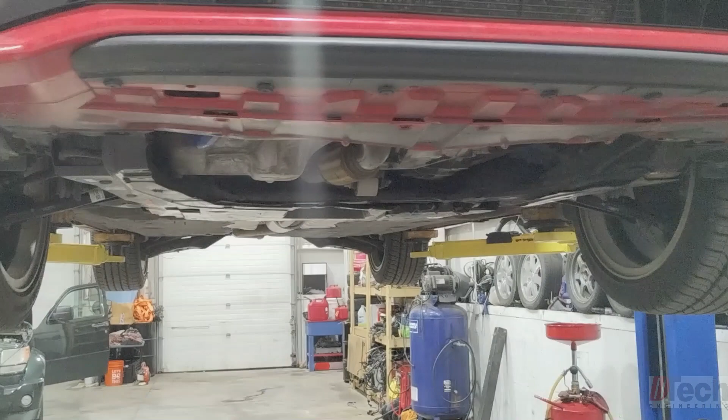So I guess we're just going to take it step by step and see if we can find out what the problem is. Obviously, if we're going to perform a visual inspection, we want to see if we can find anything that stands out or jumps right out at us, like a bent control arm or anything like that. But there's nothing really standout, nothing crazy underneath.

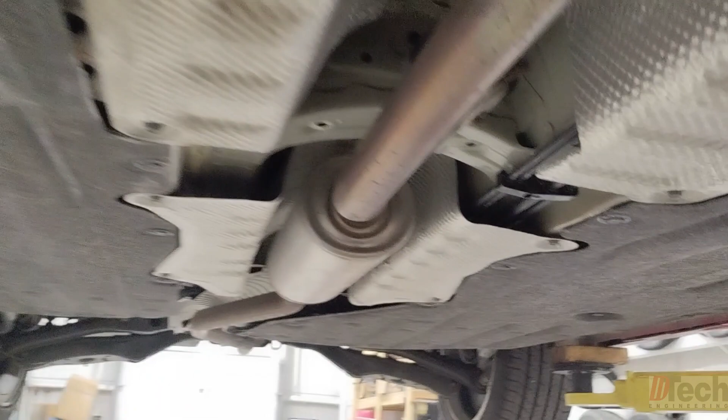Arms and stuff seem to look okay. As far as the axles, nothing crazy there, just visually. Again, we're just looking at them visually.

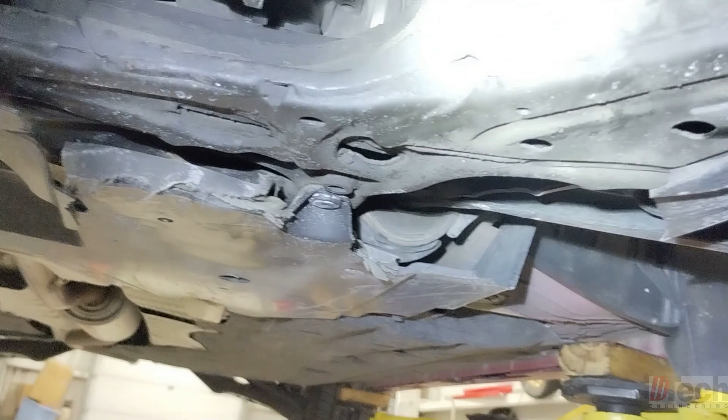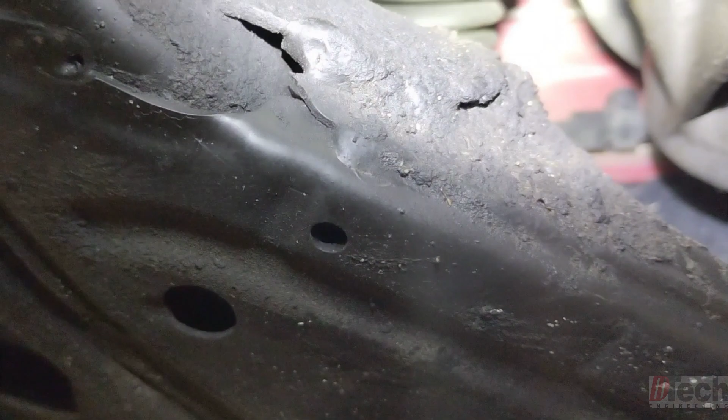It does look like possibly at one point this inner boot was leaking, or is still the one that is leaking. Actually, it looks like it is currently the one that is leaking. Let's see... yep, right there, the boot is torn. So we're going to keep that in mind.

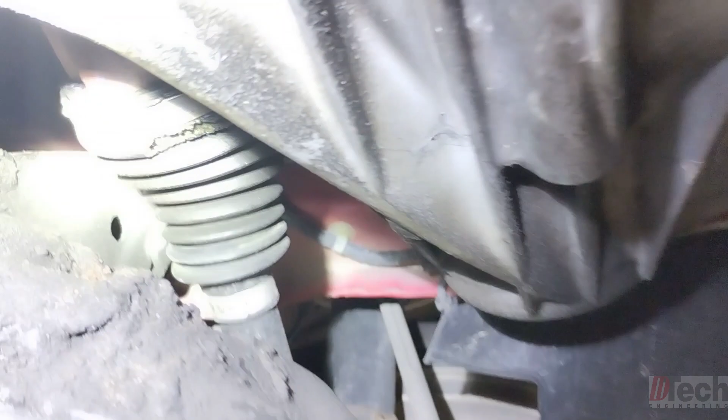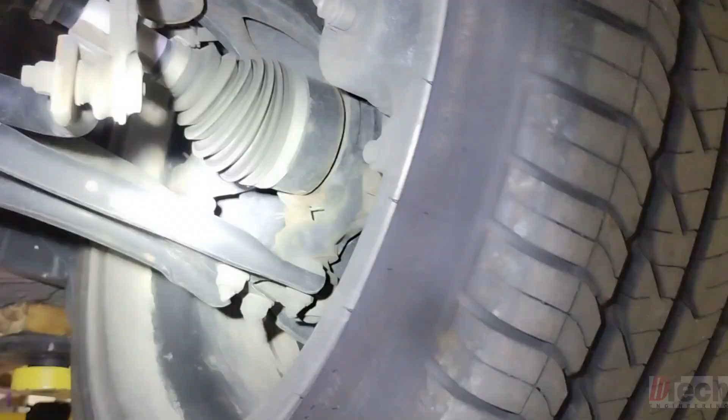Again, we're looking for a vibration deal. This is the two-piece with the half shaft, and you can see some grease coming out of that bearing area. Things to keep in mind. But suspension and struts and stuff, nothing crazy.

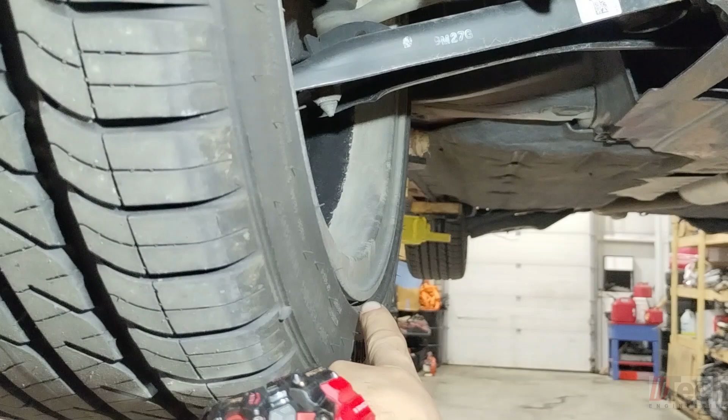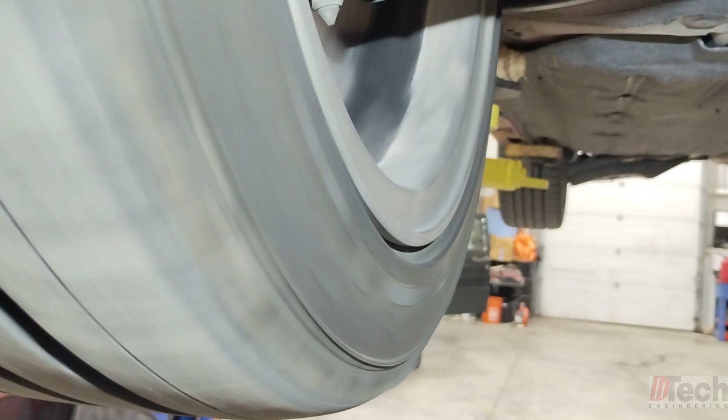The next thing I always do is check for bent rims. The way I do it is I like to get into this point of view area and look at this portion here while spinning it. If you keep your eye there... I don't know if the camera can pick this up well, but this rim has a bend in it.

Now if we look at this rim here, this one has a bend in it as well. It's hard to tell on camera. And then this rim here... there. So this one is bent pretty good. I believe this is the only straight one, the left rear.

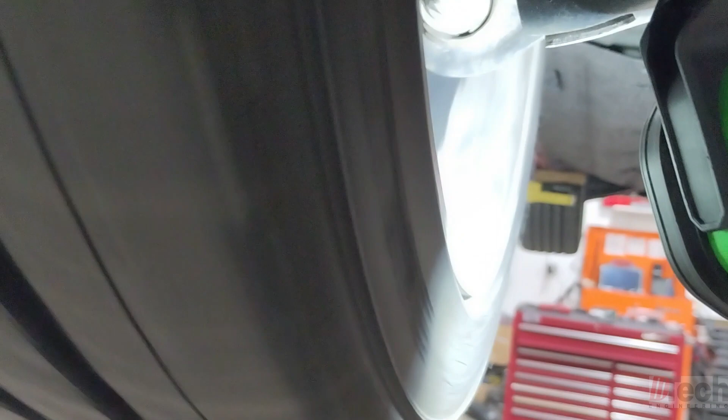Okay, so as far as the visual inspection, nothing too crazy. A couple axle boots, or axle boot and bearing up front, and 1, 2, 3 rims bent, one straight one. So whether the rims being bent is what's causing it, I don't know. It didn't feel like a bent rim, but we clearly have 3 bent rims. As far as severity, this one was the worst, those two are about the same. Nonetheless, they are bent, so things to consider.

So my next thing is I want to do a little bit of an experiment. Basically, I want to try to isolate or find the source of the vibration. We know we've got 3 bent rims, an axle boot on the left front that's torn, and bearing grease coming out of the half shaft on the passenger side front. So as far as visually trying to determine it, we don't know.

So what I want to try is hook up my chassis ears to all 4 corners, drive down the road to make the vibration occur, and first and foremost see if I can isolate it from front to back, and then from left to right, or if it's only in one corner. I want to be able to find it, so I'm going to do all 4 corners and see if I pick up any vibration on any of them, or a front or back deal. Let me get set up for that, and then we'll take a test drive.

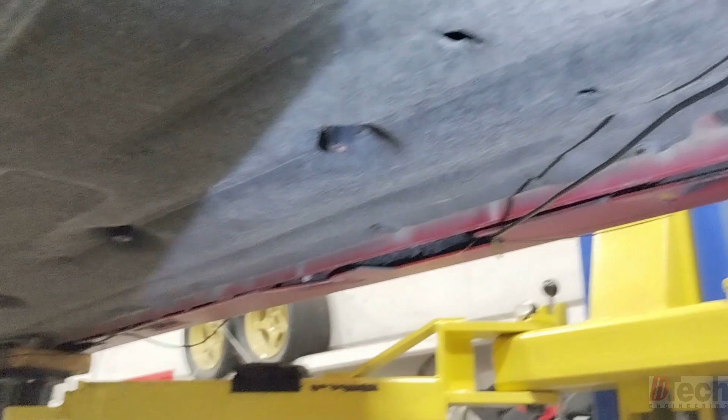Okay, so I'm all set up on all 4 corners. Just to get you a quick shot, I'm starting with the corners and going from there. I'm secured well, I checked the routing, I've turned the wheel lock to lock, nothing is in the way. So those are the fronts, and I'll get you a shot of the rear. There we go. So pretty much on the hubs of all the wheels, I'm at 4 corners, looking for the biggest vibration capture and going from there.

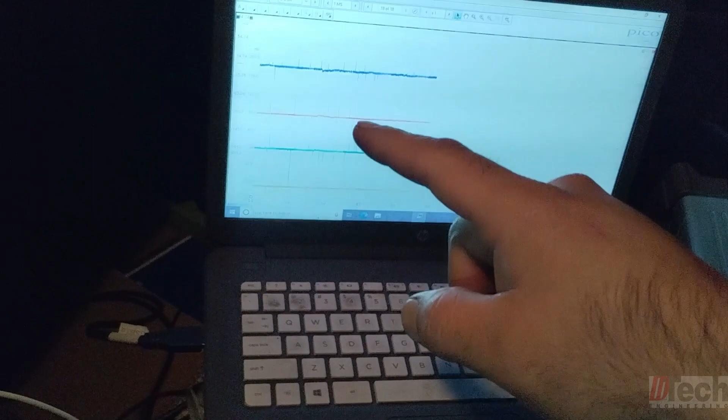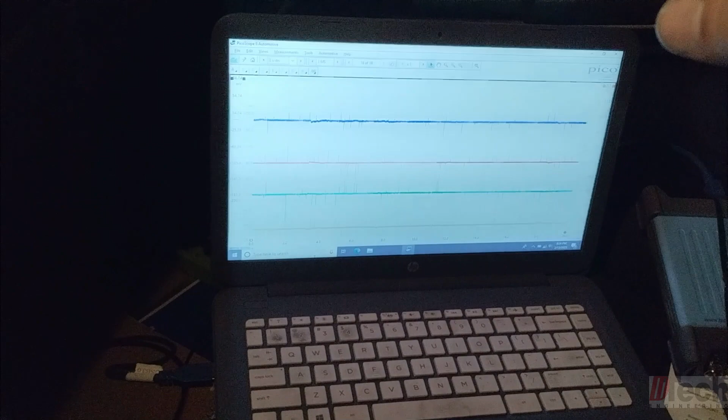Okay, so I'm set up with the scope and the chassis ears connected. Got all 4 channels going. I think I've got them set up to where it's front left, front right, right rear, left rear. So I'll go ahead, try to get on the long stretch and see if I can capture anything.

Okay, so I went driving last night, as I showed, after getting everything initially set up. It is now the next morning after I drove it for a while. I had to get on the highway to try to have some good space and area to learn when the vibration occurred.

And basically, I got it down to where I can duplicate it. It has to be right between 55 and 60 miles an hour, and it's under acceleration. If I just let off the throttle and cruise, it won't vibrate at that speed. But once you hit the accelerator and start to demand and get the engine going, vibration occurs.

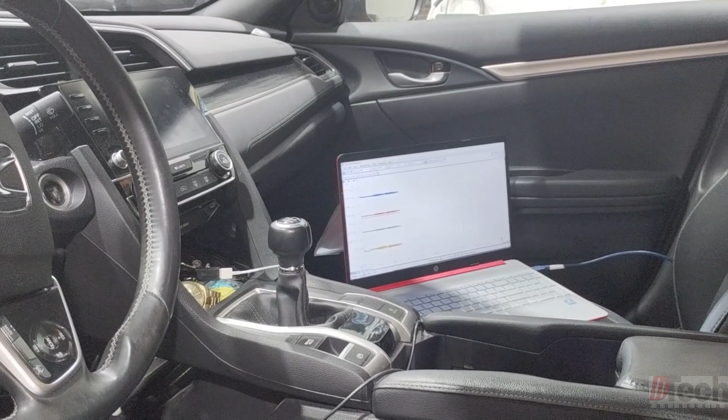So I'm set up now, and I've added a 5th channel. I'm tapped into the pedal position sensor to help visualize when I'm on and off the throttle, and hopefully we can capture something there.

Okay guys, so what I've pulled up here is one of the waveforms that I captured. One thing to understand is I did a ton of driving, a ton of waveform captures, trying to understand, capture, and see what was going on, and it took a lot of work to be able to do that and come up with basically a decision.

But the main thing to take away is that I was able to use this to capture activity at one of the corners, which was my main goal. I wanted to use this setup for the first time with a known customer actual physical vibration that's felt.

And so I decided to pull the scope out because I was curious to see if we could see it on the scope. And so just like any other diagnostics that we do with the chassis ears and stuff, remember the main thing of those, the primary job is to capture noise, but they can capture vibration.

So a side note that I learned with this was you want to pick a good, smooth, basically quiet road, because the chassis ears will pick up any bumps and cracks and gravel, rough gravel, and it'll make it difficult to find vibrations if you're capturing multiple noises during the driving.

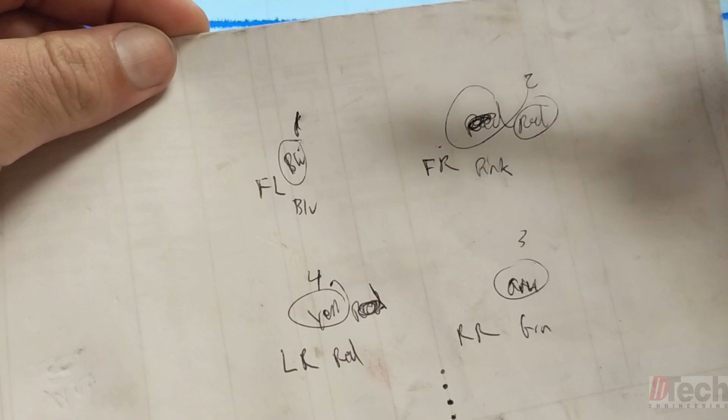And I'll show you that later after some of these, and it's going to be clear as day. So right now, these are from a little bit of a rough-ish road, but enough to be able to see something. And again, always make sure to take notes because things can get confusing once you start adding a lot of stuff.

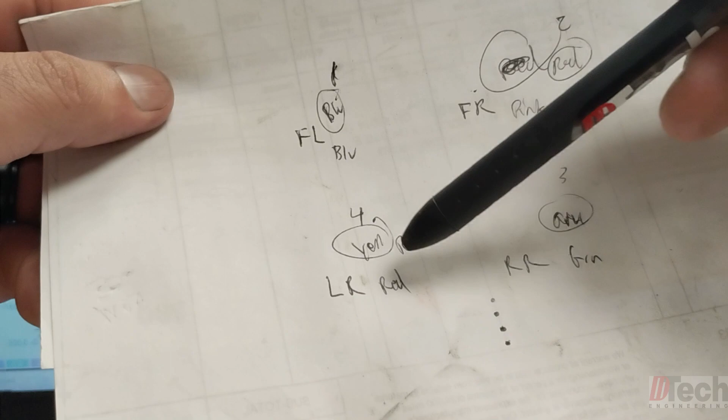So I believe I explained in the video, but front left is blue, channel 1. Front right is red, channel 2. Right rear, green, channel 3. Left rear is yellow, channel 4. So that's the order that I've got them in.

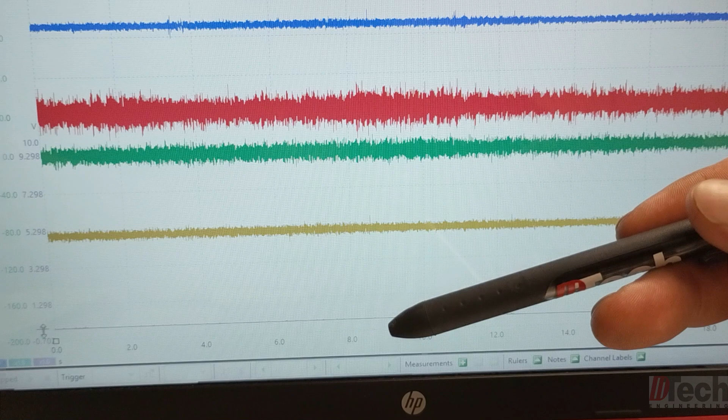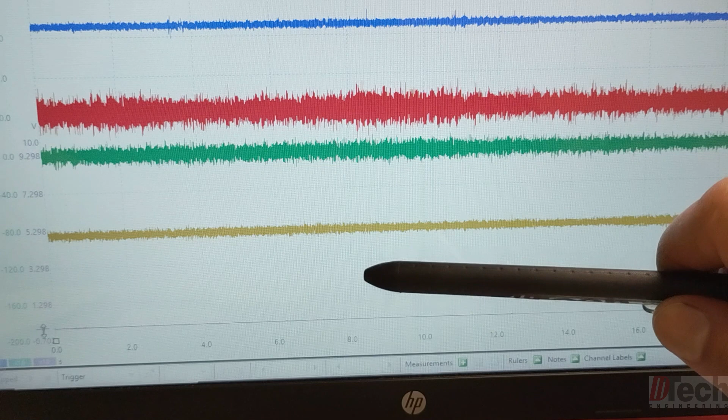And then with this type of diagnosis using the chassis ears, there's not any type of known factor or something you're looking for with all this testing. You're just looking for basically the greatest level of activity, amplitude, any of that sort compared to other channels that you're also capturing. And so basically you're looking for the odd man out.

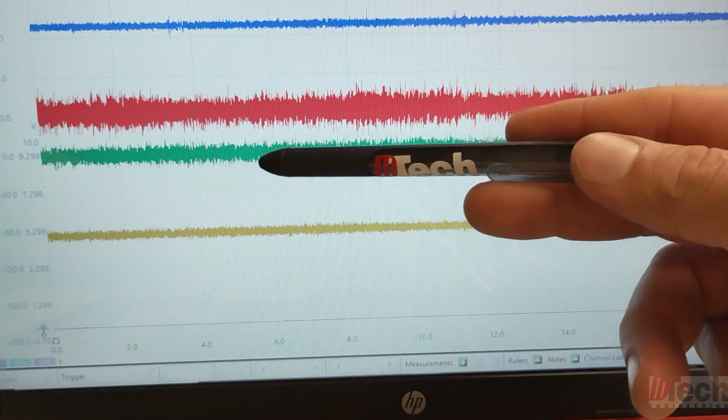And a good example here is the blue is, let's call it sort of narrow and straight. The yellow is basically the same. Green looks to have a little bit more of a wider capture, but the red is your odd man out. It's the largest out of all of these.

And so keep in mind, we are on all four corners on our basically knuckles, spindles, whatever you want to call it. So we're at the furthest point on the axle area of the vehicle. And so whatever activity is happening, that's where we're capturing our data from. And so here on this red channel, I had to learn how to create the vibration.

And basically it was under acceleration at around about 50 to 55 miles an hour. As soon as I let off the pedal, at that same speed I could cruise, the vibration goes away. As soon as you get on the pedal to accelerate again, in that speed range, the vibration would come.

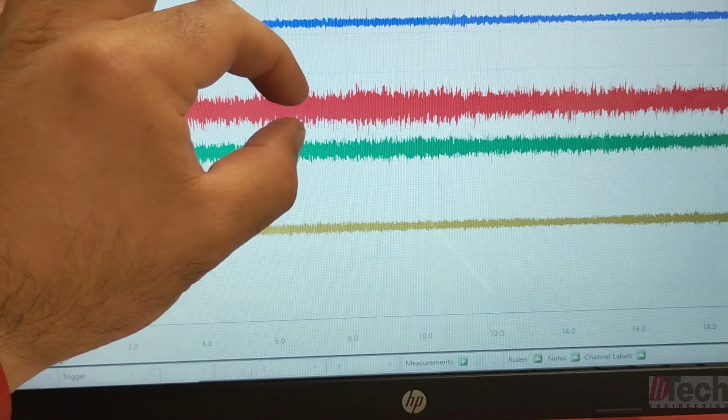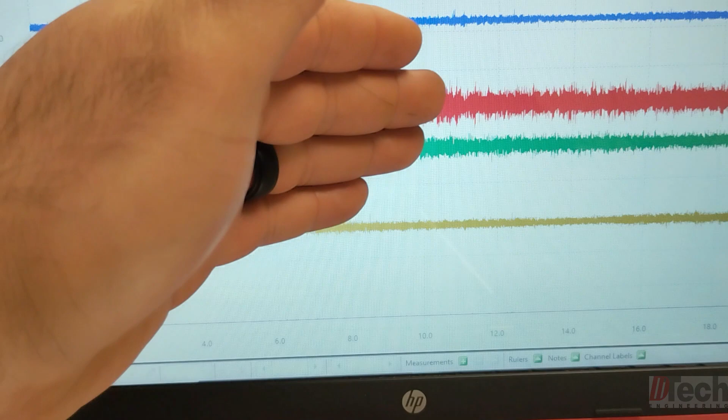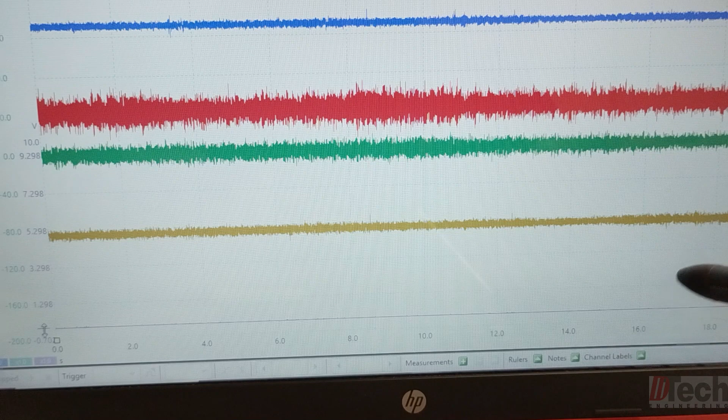One thing, and it's kind of hard, but follow me here, you can sort of see this bubble, and then it narrows down, and then it bubbles, and then it narrows down and stays straight. These two sections were points where I was accelerating, then let off, accelerating, and let off. It was hard, with all the captures I was taking, to finally understand how to recreate it and then save the correct capture. It was a lot of driving, a lot of capturing, a lot of waveforms, a lot of thumbing through them. But again, I was learning how to capture this well. So that's an area right there of vibration.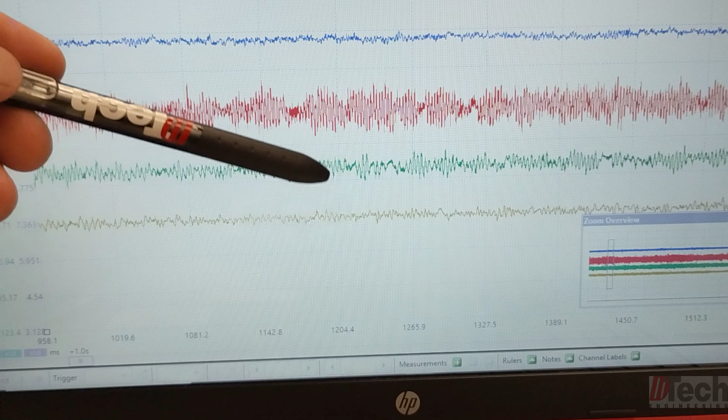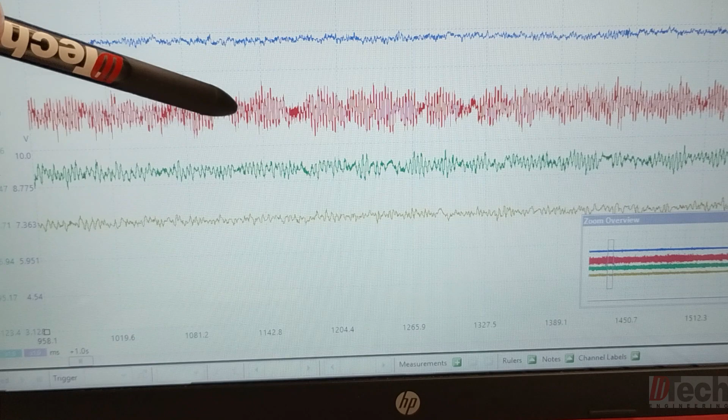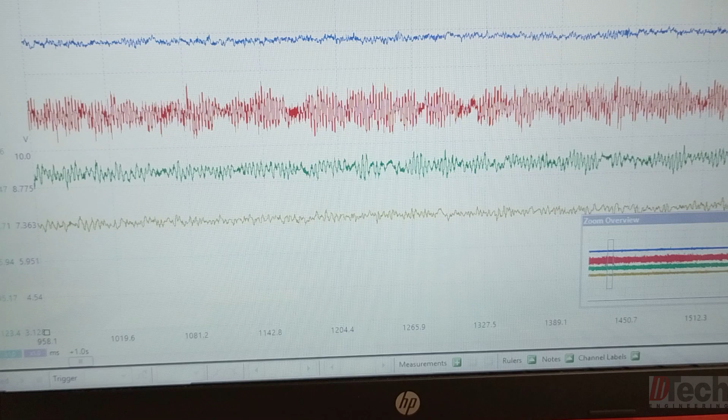To get a little bit better detail, if you're wanting to find out if you're 100% capturing good data, the more we zoom in, let me bring the blue into here, and I'll bring up the yellow. Right there alone is clear as day as to where we're having greater activity, let's call it. And we don't have any wheel bearing noise, tire noise, or any of that. We are physically feeling a vibration. So that is what we're actually seeing and capturing - vibration. And you can see that we are actually graphing it out. There is an odd man out that's coming up from the chassis attached to all four spindles.

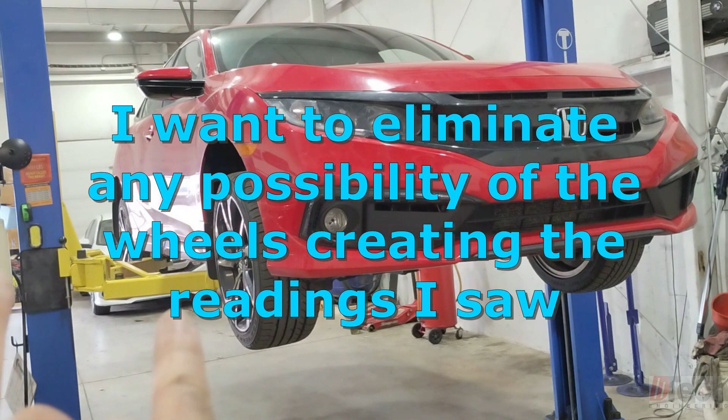Okay, so based off of those two scope captures, I'm going to go ahead and basically swap side to side, go down the same road, same way, and see if anything changes.

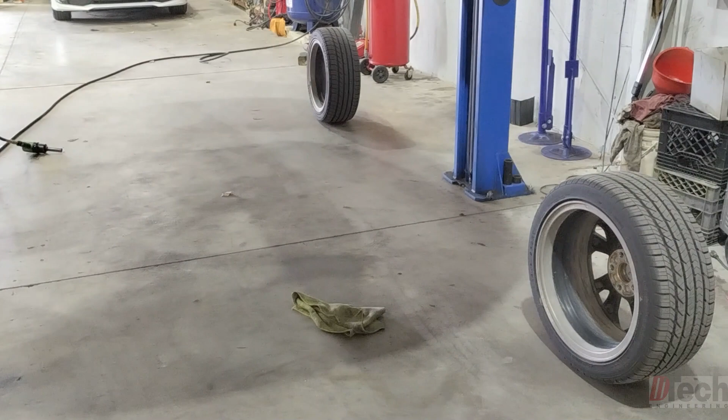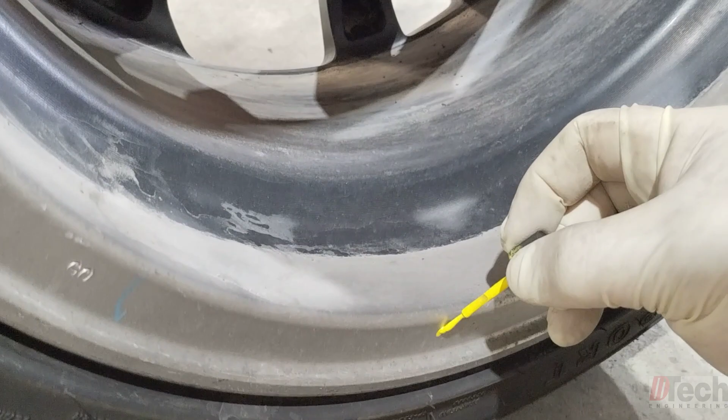So I've got all four down, still in their respective position. But what I'm going to do is slightly mark the two right side wheels, just to make sure we don't get confused with anything. But I'll be keeping them in the same axle, meaning rears in the rears, front in the front, just swapping side to side. Okay, here we go - driver's side. And there we go, driver's side rear.

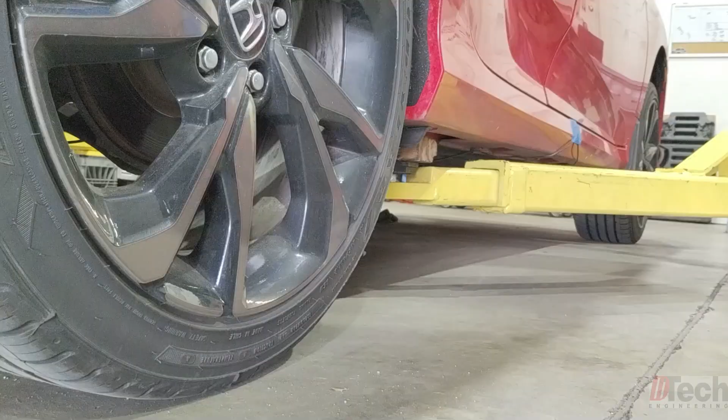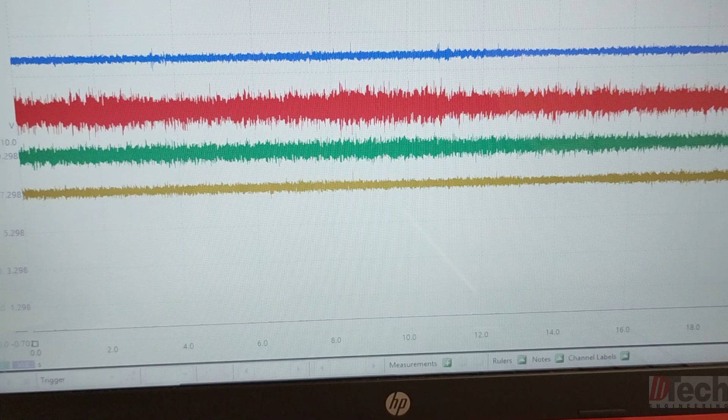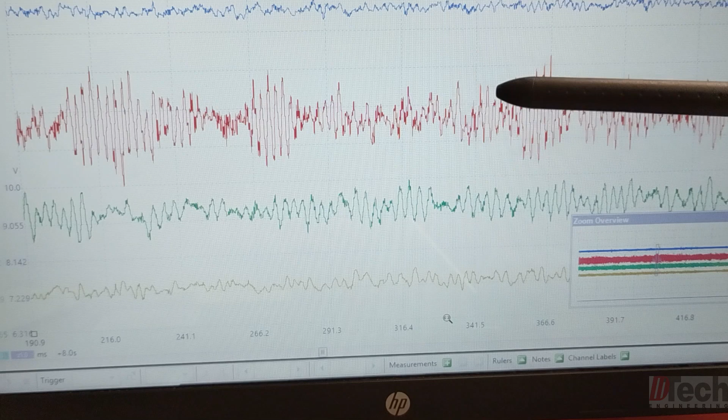Okay, so now we'll take a test drive after swapping the wheels over. And what we're looking for is for these two to change to these two. So again, I'll go here in this section to show you. And again, it's clear as day. It looks like it's a bigger vibration point that we're capturing, the way that this signal is being created - it's coming up at a greater level than what it was in this first area. So this here alone is showing us vibration or activity that we know is vibration because we can feel it. And again, red channel, which is the front right.

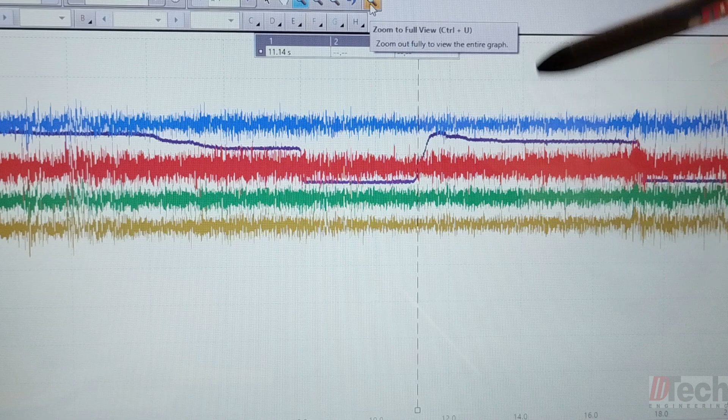Okay, so one of the things I ended up doing, as I explained in the video, to try to make it easier for both you and I to understand when I was on the throttle or accelerating, I ended up tapping into the throttle accelerator pedal sensor, which is in purple. As the voltage travels up, that's when I was accelerating, holding it, and then letting off, just cruising. When this is all the way at the bottom, that's me not on the pedal at all. And this is when I pick back up. Again, I was trying to do it in different areas, but it helped to pick that section of data and compare, just an added thing to help find it as I was driving and capturing.

So if we go here and look at the red, from this section to even this area - this was the cruising, kind of smaller-ish areas. As soon as we start accelerating, which here we're fully holding it at that steady speed, these blobs, this section of blobs, are just way more pronounced compared to these before we were accelerating. You'll see that a little bit more clearly as we go down the line under acceleration.

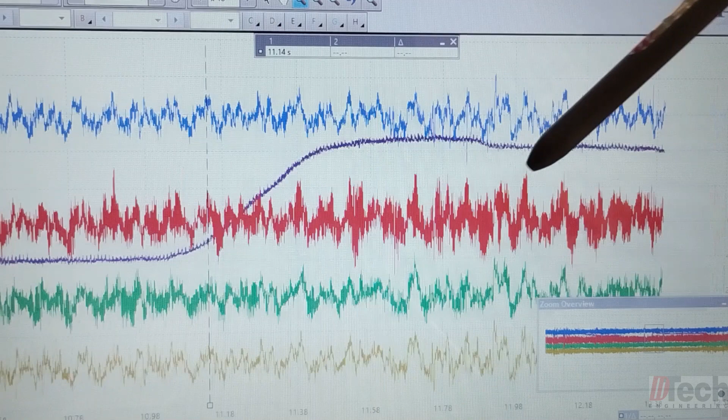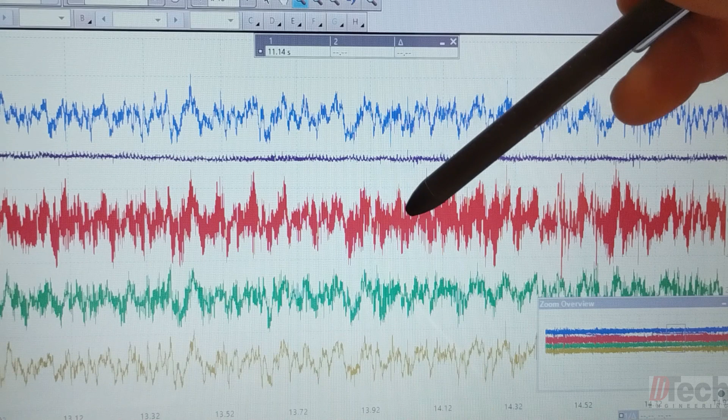And again, especially compared to the others, the red is just way more pronounced, and we can go a little bit deeper. We can see clearly how this activity is way more repetitive in that section, and the levels or amplitude for sure compared to these are greater. But again, vibration, activity, repetitiveness - we are capturing it.

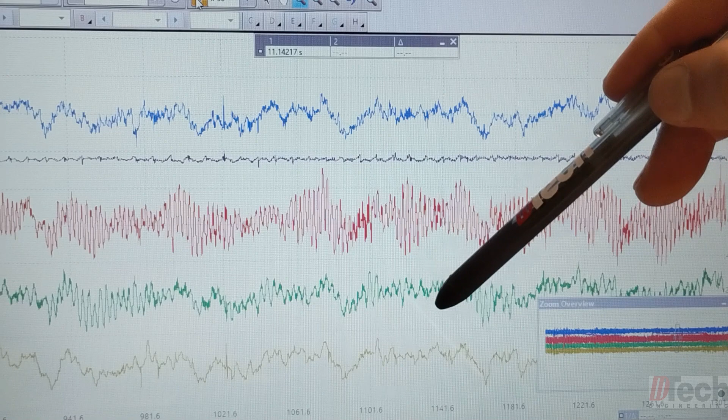If you look at this section right here, the yellow, it's a little bouncy but it's sort of straight. This one's got a little bit of up and down, and this one again is kind of like the yellow. If you remember which wheel this is - the right rear - that's also the one that had the worst bend. So I can understand why we see even here some of this repetitive vibration activity being captured.

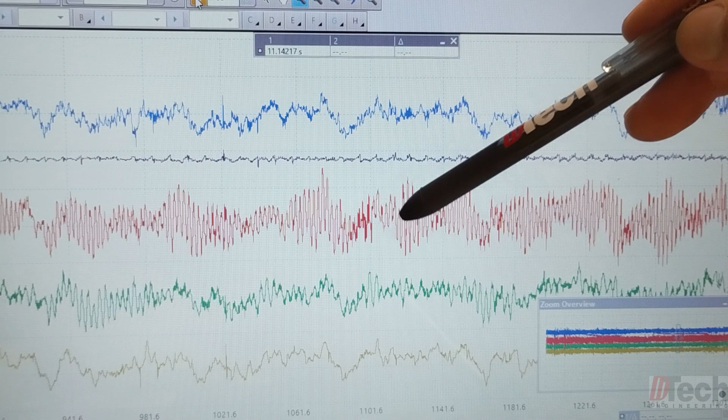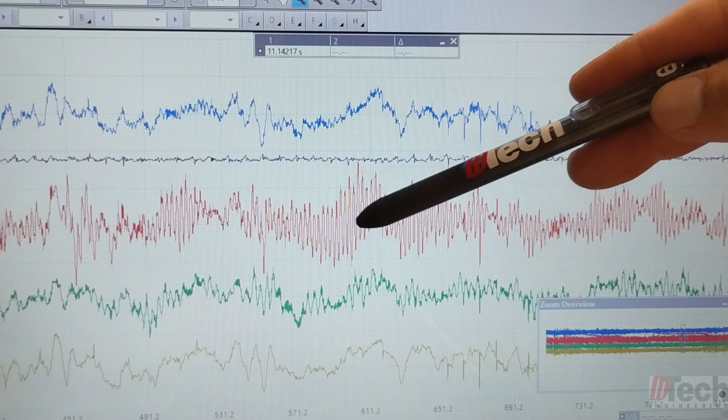But it's still not even in comparison to this red channel, with a multitude of times of data that we're capturing here physically as we're feeling it, as we're still holding the acceleration. And as we continue going down the line, here's another big crazy portion there. Again, compared to the others, way more activity on the red.

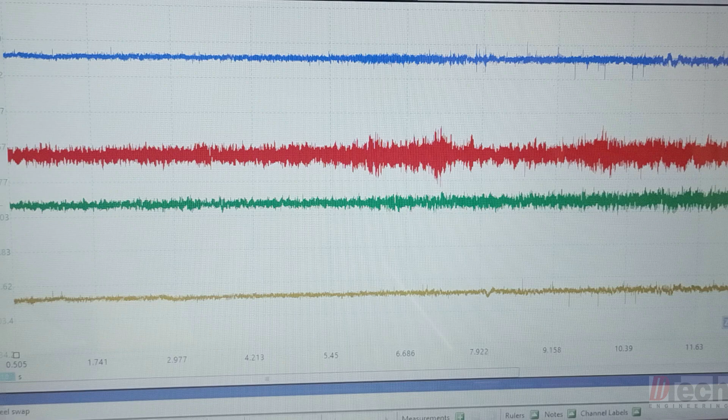Okay, so after going over the scope captures that I showed, and based off of how it felt and seeing everything on the red channel, which points to the right side, I decided to order and replace the right side axle.

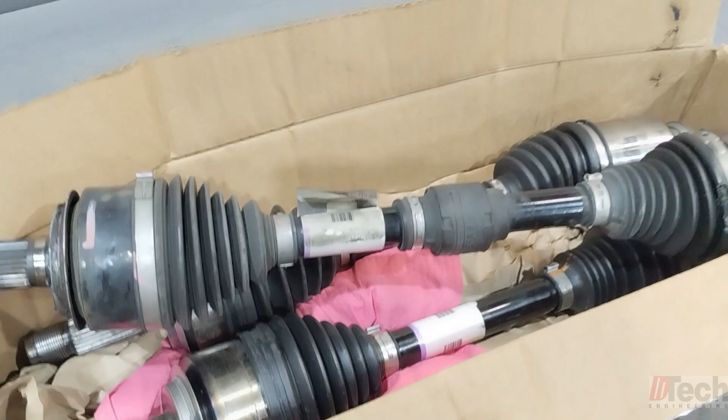So what I have here is a small collection of axles, and I think there's actually one missing. Quickly, the reason there's so many axles is I decided to replace the right side axle with this guy here. It's an aftermarket unit, readily available, so I decided to throw this in and test drive it to see if there was any difference.

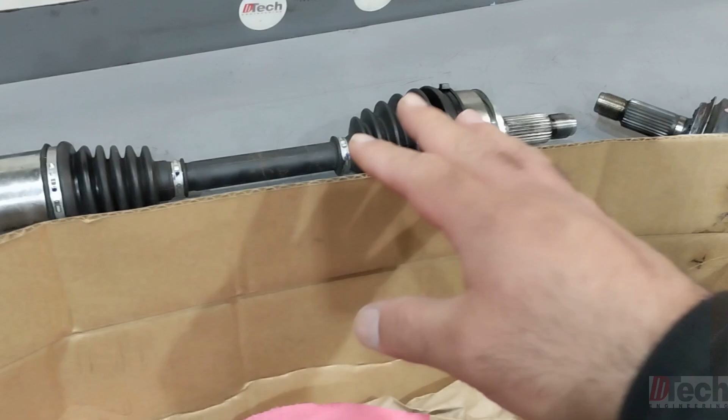To no avail, same problem was there. So just to eliminate the fact that it was an aftermarket axle, I wanted to get that last bit of questioning out of my head and decided to source a true Honda axle, which for some reason on this particular model was very difficult to find the correct part numbered axle. This was a Honda axle, but it was one of the wrong ones. There were differences in shaft size, length, and cups, so it was very hard to finally locate the correct one.

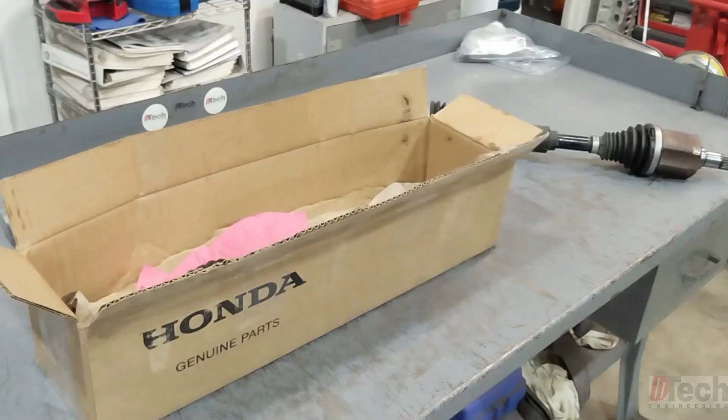Installed the Honda axle, and same thing—vibration was still on the right side. Things just start to get very frustrating and difficult, a pain in the rear because everything is showing right side, right side, right side. You feel it, you see it on the capture, everything points to the right side.

I started to think about possibly that intermediate shaft that has a bearing where you saw grease coming out, wondering if that could be causing it, or possibly the rotor, so on and so forth. But I just didn't want to go that route, especially because the intermediate shaft was, I think, above $500. The rotor, to me, at this point, just did not make any sense.

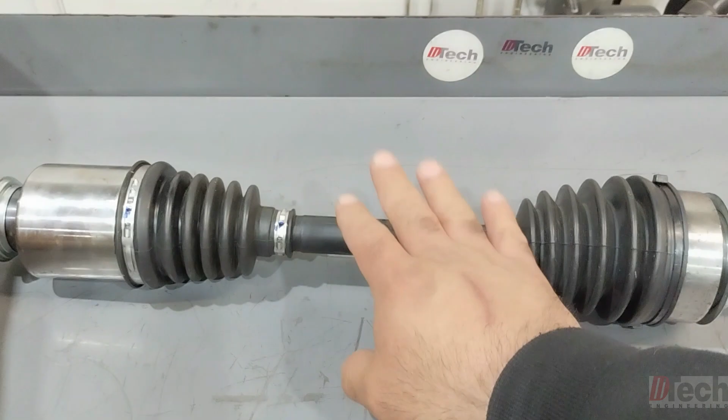Just before giving up and saying I don't know what it is, which I typically don't ever do—it's just not my persona—I decided to do a Hail Mary and for some oddball reason replace the left side axle, which is the one we saw with the small tear. I decided to source one. Again, a Honda axle was a problem finding and locating, especially in a timely manner, if it was even available. So I went with an aftermarket one, same style as this, just left side. After the test drive, the vibration went away.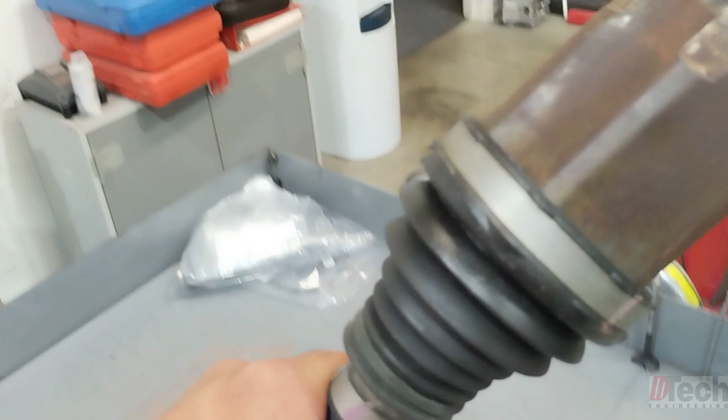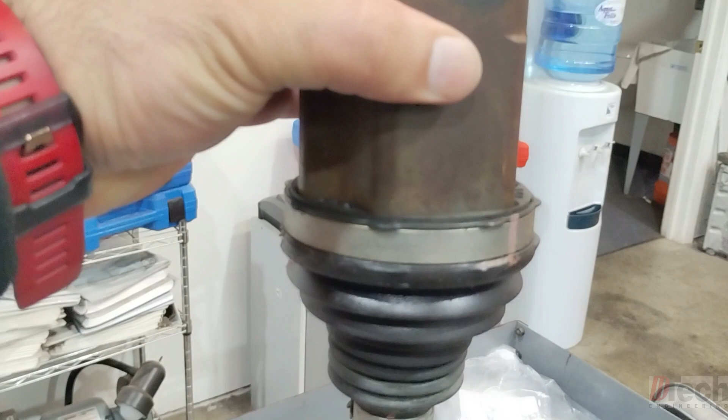And so it appears that in this axle—it's hard to capture on camera, hopefully you hear that—yes, I know axles will have some joint play and so on, but I guess on this one, it's enough of a wear inside for there to be enough of a situation that it will create a vibration on this inside cup.

So in order to try to explain the cause of the vibration and why it was felt and captured on the right side, here's my train of thought: that axle cup is inserted and splined right into the transmission, which is directly splined onto the differential. On the other end of the differential, we've got a directly splined, installed intermediate shaft—a solid piece—which goes out to the passenger side, where we have another direct spline connection for the axle shaft. At that point, we do have those CV joints.

But from the beginning, that inside cup is basically directly connected inside the transmission with the differential over to the right side. So my whole mindset about how this happened and how the scope captured everything on the right front wheel was that we have wear in that cup—the inside cup—and the shaft.

There's enough play there that when we accelerate and get torque for the transmission to spin at that specific speed, that amount of play rotating at that speed creates a vibration. The joint is vibrating, causing vibration in the cup as it rotates and spins with acceleration. The vibration then travels to the right side through the direct coupling of that cup. So the cup is vibrating at that speed under torque, and it sends the vibration traveling along with that speed.